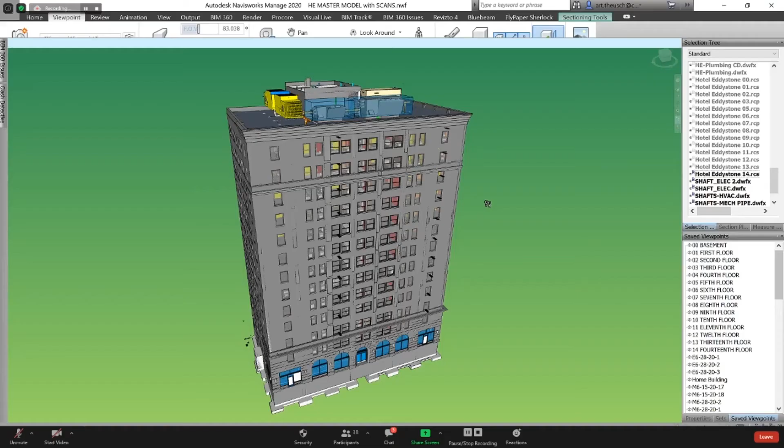The topic of what I was going to speak about today is everybody gets excited about BIM, and Austin hit on something very good that really resonates with what our approach to BIM is: having really strong people that know how to lead this effort.

There's a skill set to the models, and there's a skill set to bringing things together. For example, this project here in the background is Hotel Eddystone, right downtown Detroit. It's an O'Brien Construction project. On this one, Collaborative was hired to lead the entire process and to draw for every trade, which is rare in the industry. But there were a lot of things they brought to the table that were really progressive and intriguing to O'Brien.

For one, it's the collaborative approach to working with the designers. I'm a very big advocate of getting BIM on board as soon as possible. From my days as a construction manager, as soon as we knew we possibly had a BIM project that the designers were working on, we were at the table asking to play a role in reviewing the models, to bring construction knowledge forward into design. As Austin talked about earlier too, there's a lot of expertise in the trade contractors in the construction arena that can really help evaluate design and bring their knowledge forward to bring a cohesive design to the table, so that when things get handed over to the owner, it's really well thought out.

But part of a good BIM effort is having a person that knows how to lead this. I've seen all things across the board as a consultant. We work coast to coast - we're in California, we're in Boston. We're all over the southern region of the United States right now.

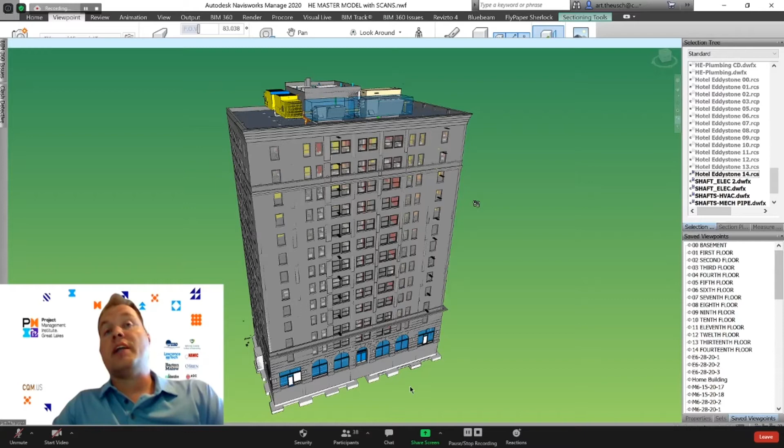And there's a lot of things that we run into, a lot of different coordinators. I'm seeing a trend where a lot of people right out of college have the skill set to play with the models, and so companies put them out there. One of the challenges with that is there's a lot of knowledge and a lot of very smart people at the table for BIM that have to be brought together and led across the finish line to have a really complete, coordinated, constructible project. A lot of times younger people will struggle with that because they haven't built their leadership skills yet.

As much as they might know how to put a BIM model together, there's a whole component of a skilled leader that has to come to the table and lead these 20, 30-year-old pipe fitting veterans and these designers that have 20, 30 years of experience. They have a lot of knowledge, but it's about how to pull from everybody to get a really good product at the end of the day.

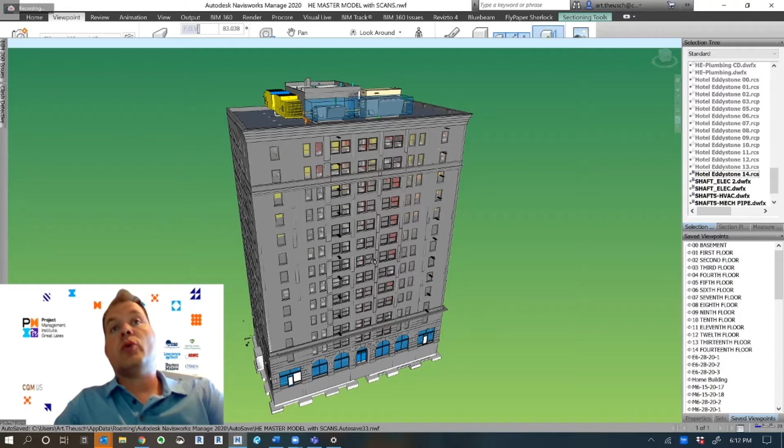Feel free to jump in and ask me questions as we go. This is a project with a 15-story renovation, and we went out here and laser scanned the entire facility. This project, even though it's about 100,000 square feet - which isn't huge by a lot of standards for BIM projects I've been on in my career - brought a lot of unique challenges. It has a historical preservation component, which brought plenty of additional design challenges.

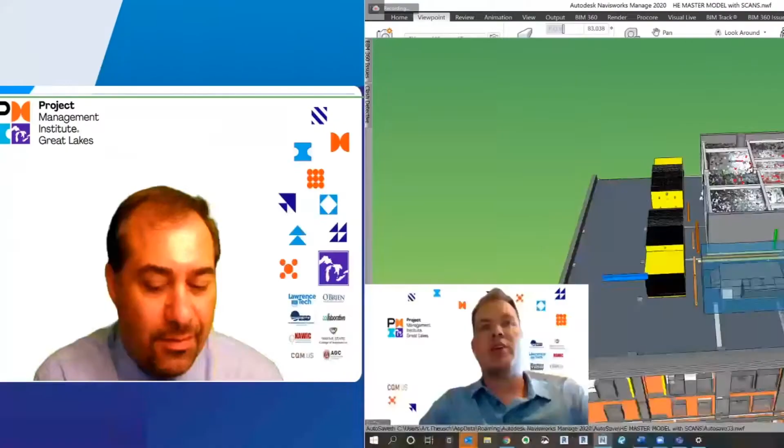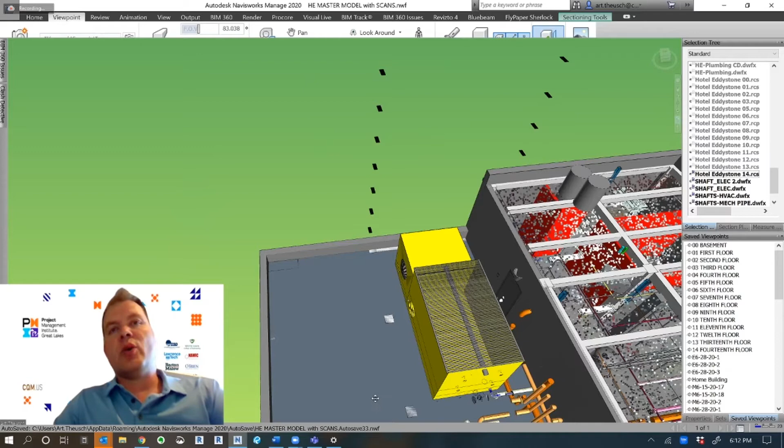For example, our team spent about a month and a half just working on these air handlers - these two air handlers right here - and the generator and all the rooftop units. There were a lot of things where this is where relying on your experts that know construction comes into play. A BIM modeler can draw anything under the sun and the software will let them. Problem is, a lot of what they draw can't be built. So having somebody that knows how to model well partner with somebody that knows how to build well, you can get really good products.

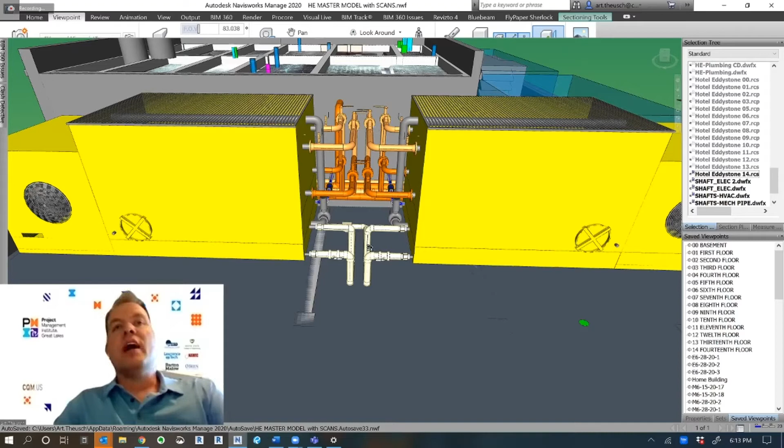So for example, this is actually probably our 4th version of these air handler units here. A lot of it was because of limitations of materials - the right flanges, the right bend radiuses, the right clearances around flanges and around the valves. We also had to account for sight lines for historical purposes.

Moving an air handler unit 2 feet north was not an option, because there are sight lines that have to be protected. So we built some crazy stuff in here to watch for that.

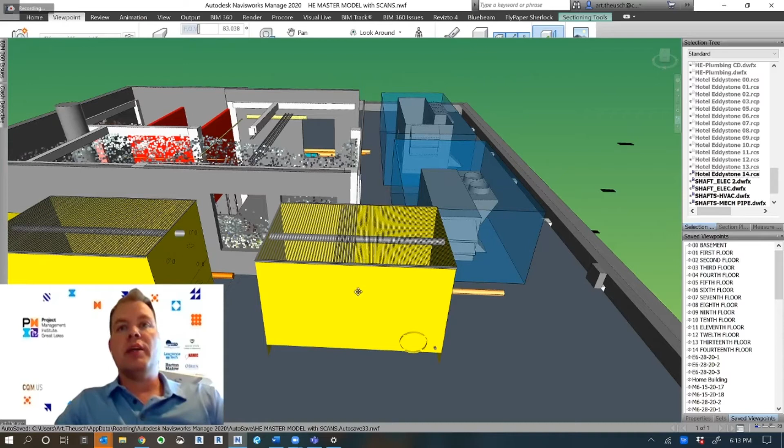We've talked about laser scanning a little bit. I'll zoom in here to the penthouse. It's a very little penthouse, but I'm trying to go slow so I don't make people sick. I navigate models all day, every day, so I get used to it.

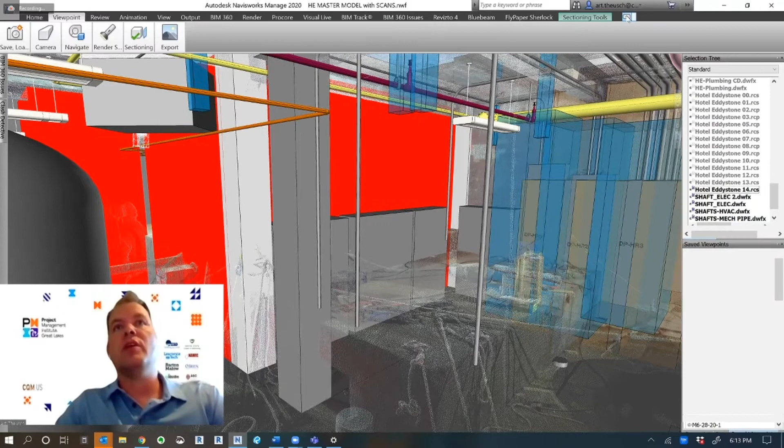People that are new to it kind of get turned around. You can see here faintly in the foreground there's actually some kind of crazy built-up floor. What's nice about the BIM model is we can overlap existing conditions with the planned conditions.

In fact, this wasn't the original design for the mechanical room. They had a bunch of stuff that was going to be out in the middle that would be troublesome to build around. Let me go back up so you guys can see this a little better. What's nice about models is you can slice them and move them all around.

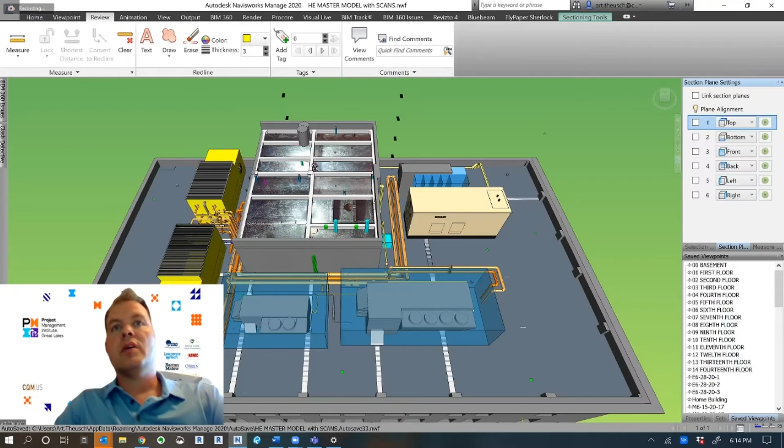Let me move this guy up just a touch. That's probably high enough.

So here's our penthouse, and we scanned it. Once I stop moving, you'll see it regenerate for a minute. You can see this little platform is sticking up.

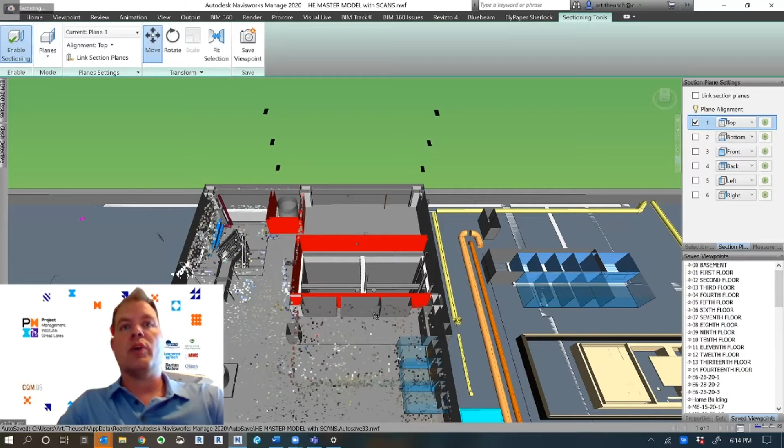Originally, the design we were given had these pumps sitting right out here in the middle, and these water heaters were sitting over here. So we had no access to three-quarters of the room because the design we were given was blocking a lot of the access. So you get the trade contractors together, and you can really evaluate proper layouts.

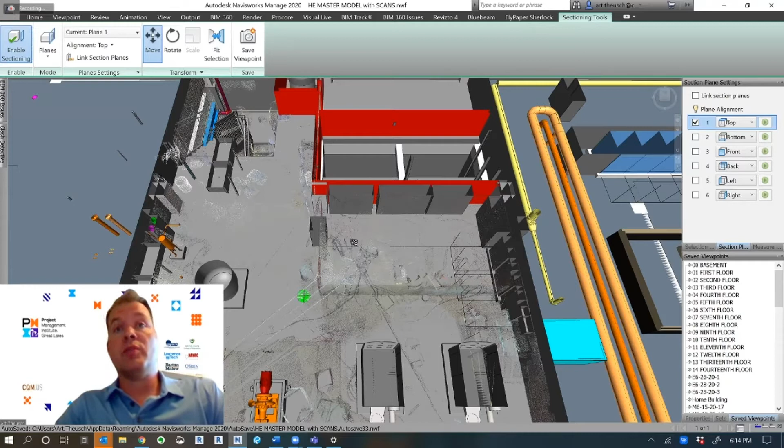We even brought up this whole constructability thing here, see that platform there. We started putting our panels here and we realized, hey, that might not be possible if this isn't going away.

And so through a lot of digging and some structural analysis, we realized they were going to cut this out. They were going to pour a flat slab so that we could put panels over here and gear and things like that.

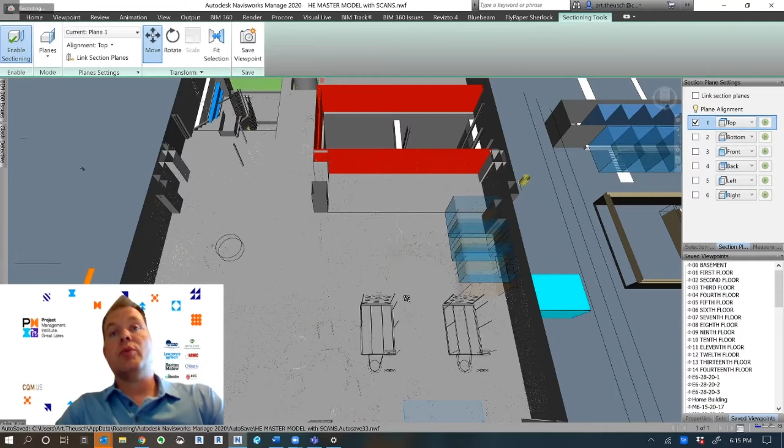I'll jump down for a minute here to the basement, because a lot of the mechanical is on the roof and the rest of it's in the basement. And so we have this big mechanical room.

We have the electrical room over here. And the fire pump room is right here. And then we have the mechanical room right here.

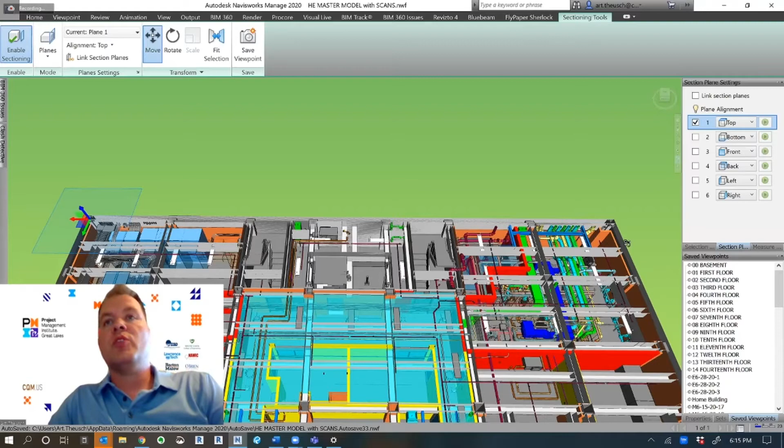So this mechanical room, sadly, was redrawn three times. And you don't ever want that.

But as we got into design, we realized there were a lot of code limitations, that this red wall here had to be built in because the fire pump had to be a separate room from the mechanical room. And the original design did not have that.

So what looked like we had a decent amount of real estate turned into quite a congested room. We also had to redesign the gas line location.

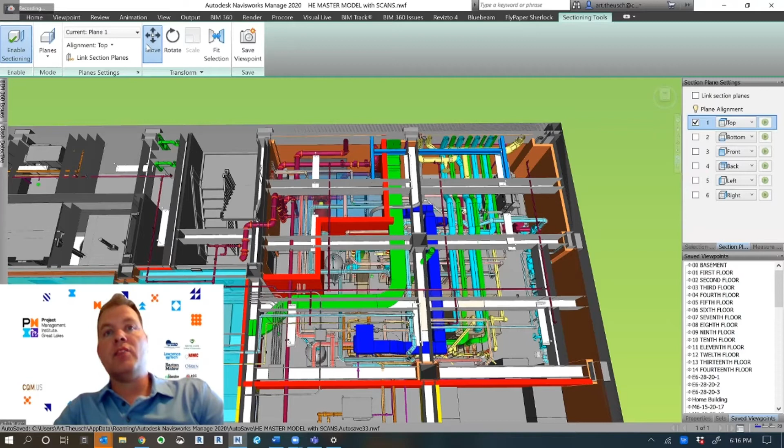Part of it was they had a buck hoist sitting right here in the background, and they were trying to avoid bringing the gas line in off the alley, simply because they didn't want to take the buck hoist offline.

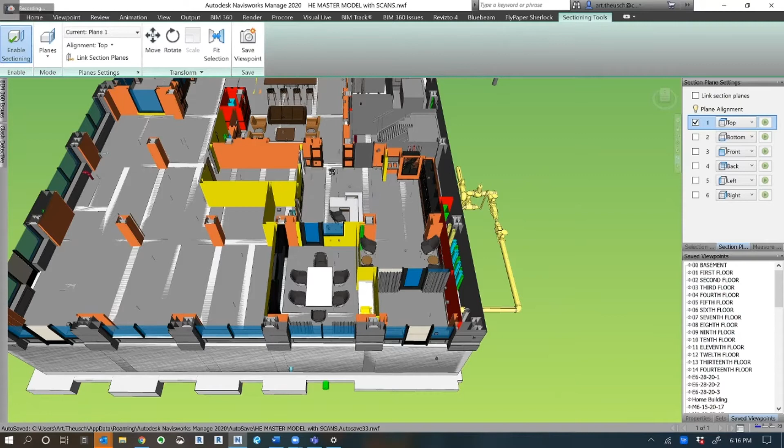But the problem we ran into was they wanted to bring the gas line in from this side of the building right here. And this is the pedestrian entrance. There was no frontage anywhere to put this gas main assembly where the designers originally hoped it would go.

So it just wouldn't work. So we had to put it in an alley. We had to study the alley to find out, could it be done? When would the buck hoist come down?

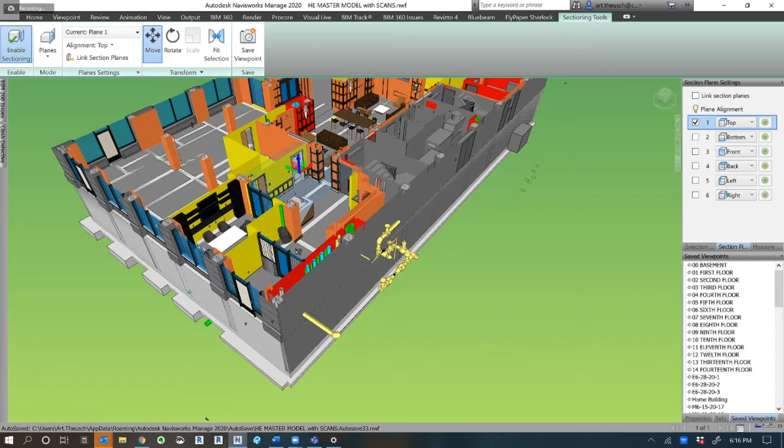So these are the things that you talk about. I mean, yeah, you could run a clash-free model and do some analysis, but if you don't have construction teams thinking forward about how you're going to build this, and the challenges of when you build it, clash-free is only getting you out of the gate. It's the how do you build this thing that brings a lot of value to the construction management team.

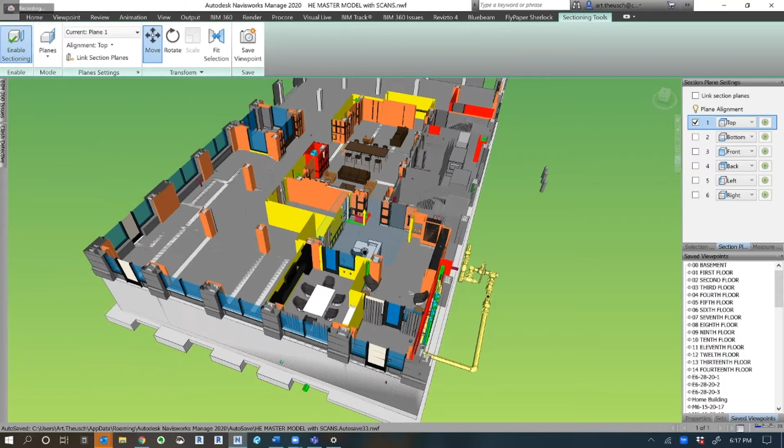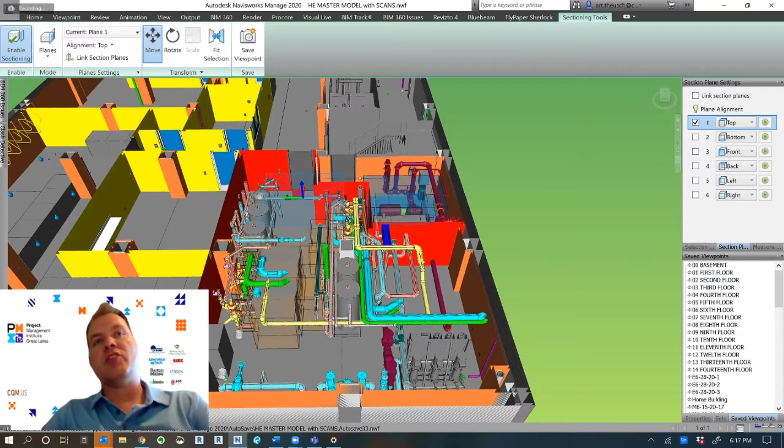One of the things that Austin hit on is analyzing how people flow through spaces and how they use it. Even to this date, I'm not excited about the layout of this room. If you look here, there's your entrance to the mechanical room right there. You've got a very tight space to get through to get back over here to the rest of the room. It was just the nature of limitations of construction that we couldn't put these guys with all their piping assemblies here. We couldn't put it back where it was originally designed because this is where all the pipes turn up to feed 14, 15 stories of a building.

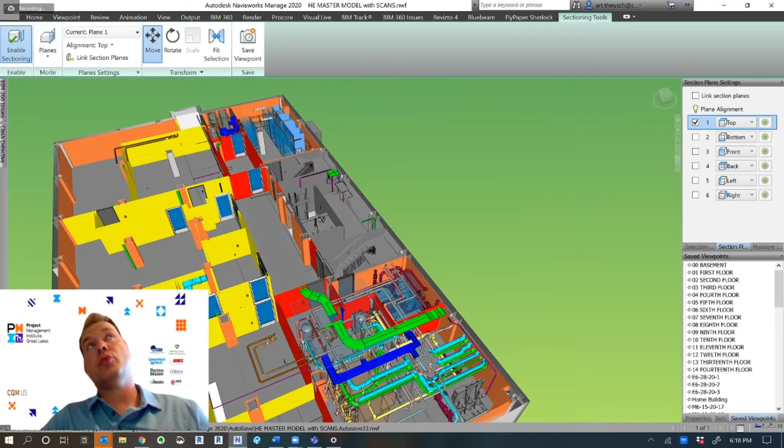Another interesting component of buildings is this building had basically floors 2 through 11 supposed to be typical, and 12 and 13 are typical as well of each other, so you've got basically like 2 penthouse floors. So when we got into this, we thought, hey, we coordinate the basement, we coordinate the first floor, we coordinate the second floor, and then we coordinate the 12th floor and we're done. Maybe the penthouse, so maybe 4 areas.

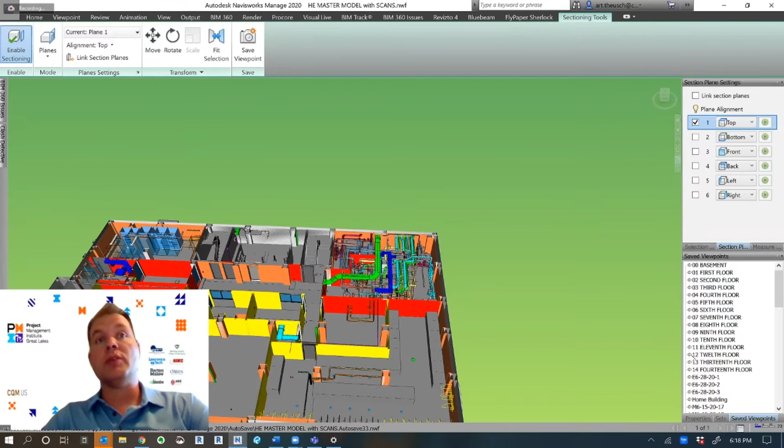Well, the building shifts, and that's what people don't always think about - how things cross through a building. For example, electrical crossed through the ceiling of 3, so we had to pause at 3 and look at those challenges. Some of the water lines fell off at the ceiling of 6, which caused some problems there. We also had some shafts that transitioned between 6 and 7 - the locations changed. So we had some very challenging situations, actually the big one was on the ceiling of 11, and it posed a lot of challenges that nobody really thought about.

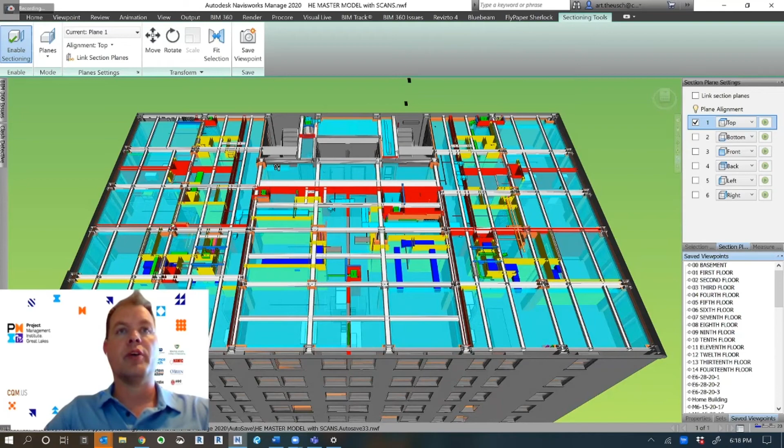Art, did you do this model as a consultant to the owner, the architect, or the contractor? We were hired directly by the construction manager, and the trades were assigned to work with us, which is uncommon. O'Brien wanted one finger to point at us to solve it, so we were a little nervous about that, but we felt confident in our team, so we took on that risk, thinking we could bring a lot.

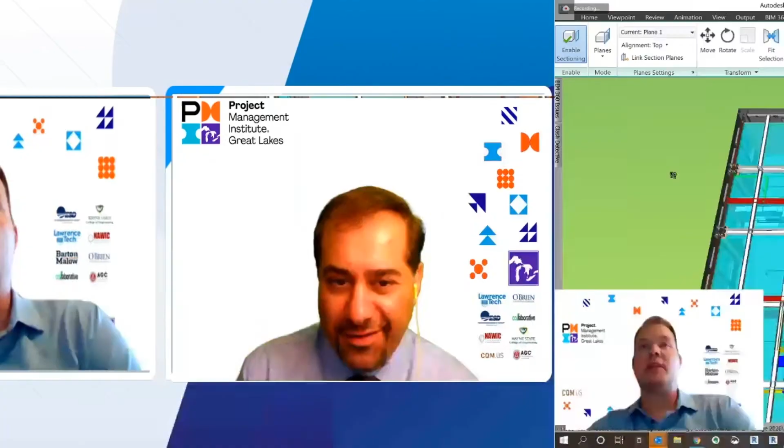On the same job? No. Sorry, no, this is Connor. Okay, Connor's on this job.

Okay, so my question is, from your experience, what would be the best scenario? Would it be to have this done from the owner side, or from the contractor side? I've got a mixed reply to that.

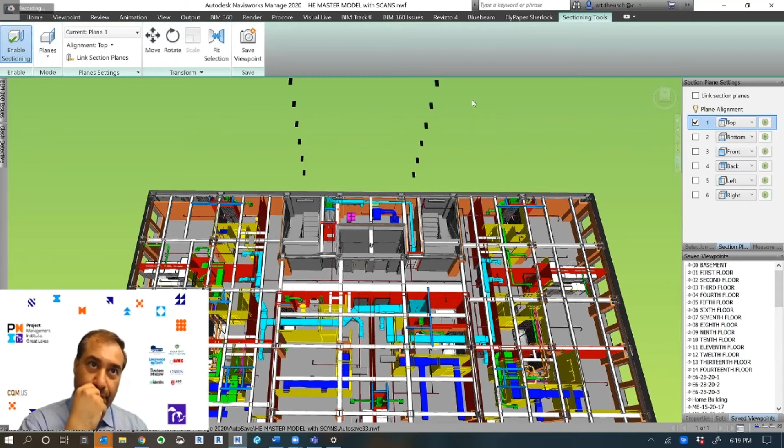A lot of trades are becoming so skilled that BIM is the way they work - as Aaron was saying, they just do BIM because they do it. When that happens and you get enough of those contractors on the job, BIM will just naturally happen because it's so valuable to them, to the way they work. I find owners, as Austin and I have talked several times - we've known each other for several years - some owners are for it, some are not. Some will view it as an expense. A lot of good construction managers I've worked with that have really robust in-house BIM teams, like Austin was talking about, they just do it because it takes so many headaches out of their court to plan this before anything's built. So there's a lot of different approaches.

I think a lot of good owners, like Austin has said already, wouldn't do a project without it because of the value savings it brings. On this project, I was a little skeptical it was going to go forward with BIM because it was a development job, but over the last couple of years we've actually done a few more. When I first started doing BIM, development jobs always scratched it - it was just a cost they didn't want to incur. Over the last 2 years, I've done quite a few high rises - this is actually our third one over 10 stories in the last probably 6-8 months. It's because developers are realizing we can head off a lot of problems early on and actually save them money instead of being an expense to them.

So as a consultant, do you think this is just for big projects, or can small projects utilize BIM as well? For the longest time, we were seeing that if the project really wasn't over 10 million, people wouldn't consider it. But ironically, I've got home builders coming to me that build a lot of homes recently, and we just started drawing custom homes because there's so much value for them. At first I shied away from it, but they insisted that they wanted to do it. So I think BIM is reaching into the world in so many different areas where it just makes sense.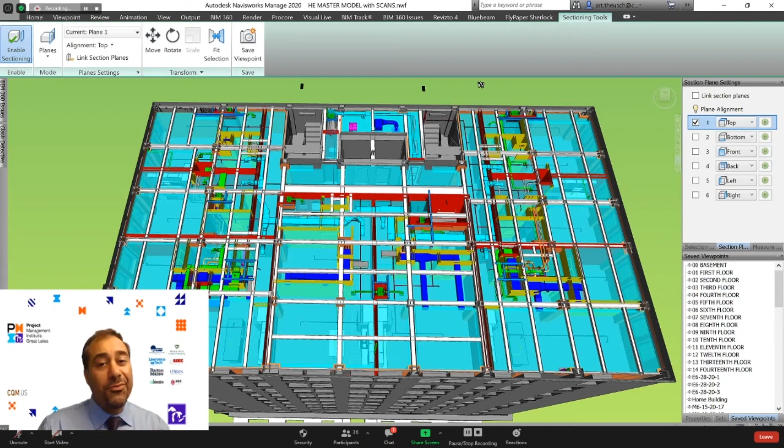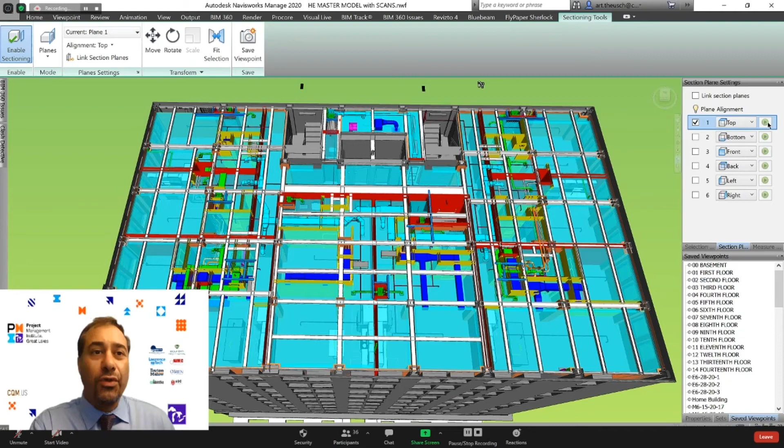Here's a question. They're saying if an industrial project is more complex toward mechanical stuff, let the mechanical guy do it. If it's architectural, let the architectural or maybe the carpenter do the BIM part. Is that something that you would recommend as a consultant?

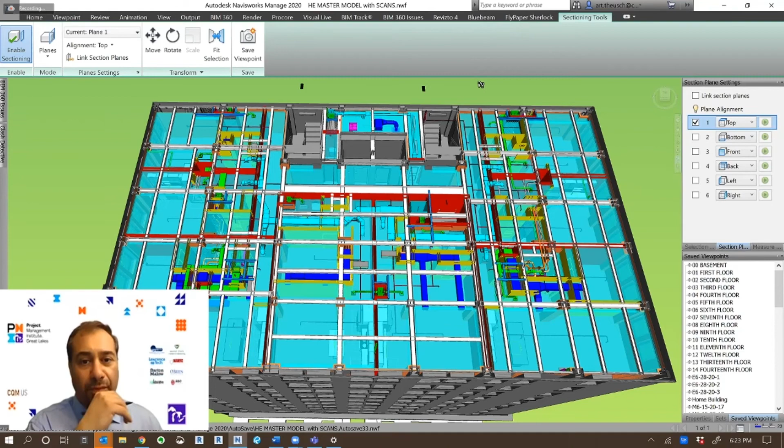Would you be interested to enter the project as like owner rep or contractor rep, or do you think it's wise to kind of leave that responsibility to the major subcontractor who's doing the most of the coordination and clash detections? I would really push anybody that has a big stake in the game to manage here to push for BIM.

So for example, I would definitely encourage the construction managers to push for BIM. And even, like you said, key trades. The logic that I have behind that is anytime you can protect your profitability and your productivity of your crews, BIM is in your best interest to do.

Because anytime you can pre-plan something and head off challenges that would come up in the field. If we find a problem now, for example, on this project, if our team finds a problem, it really affects one trade for the most part. We fix it, problem solved. If it happens in the field, it starts to affect not just the trade that it was responsible for, but it also affects the other trades that have to rely on it. So I don't know if I really answered your question, but I think it's in every contractor's best interest.

I guess one of the difficulties in this topic is the standardization, because there's no standard way of doing this thing, and people have been developing it as they go along. You mentioned something about a Penn State standard that you guys are using, and that's what you recommend to use?

Yeah, we always start off with a BIM execution plan if we're brought on early enough to get to the table before a lot of the rules are put in place for BIM on a project. So if we come in before the trades are on board, we will put an execution plan in place. The execution plan talks about the level of development of the model, who's going to be involved.

I did this out in California recently for a huge client out there, and we talked about what components are in the building. Is there access floor? Is there high-end kitchen equipment, things like that? And once you start to realize where the risk points are of a project, then you can start to rate it so that you can get the appropriate parties to the table to do BIM.

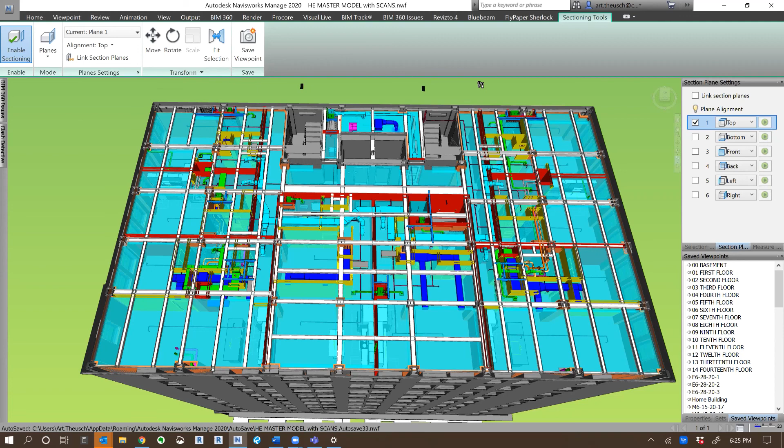I'm seeing a push on more projects for even guys that do wall assemblies to do BIM because people want to know where the king studs, the headers are, things like that. Things that they constantly get run over in the field once the mechanicals lock in place. These guys are coming to the table and say, we want to protect our space too. And so I've always been a fan that if any company self-performs, they should figure out BIM, because once you self-perform something, if you can put it in the model, you protect that space.